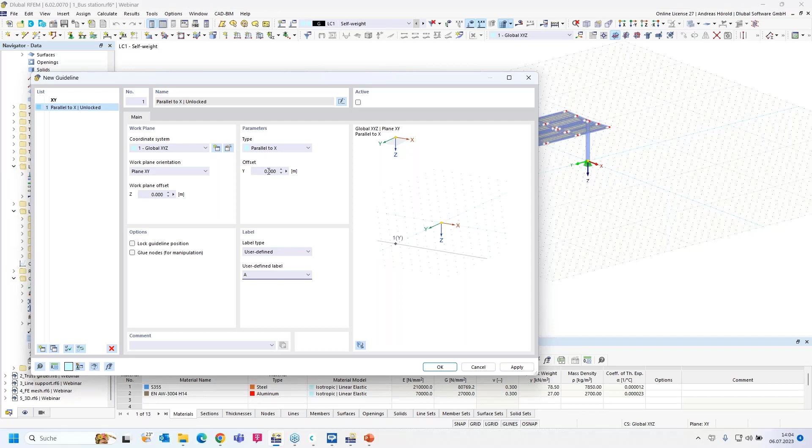So we start with the first guideline. We call it A, parallel to X, and start with an offset of 0. Apply, and you can see in the RFEM window that the first guideline is created.

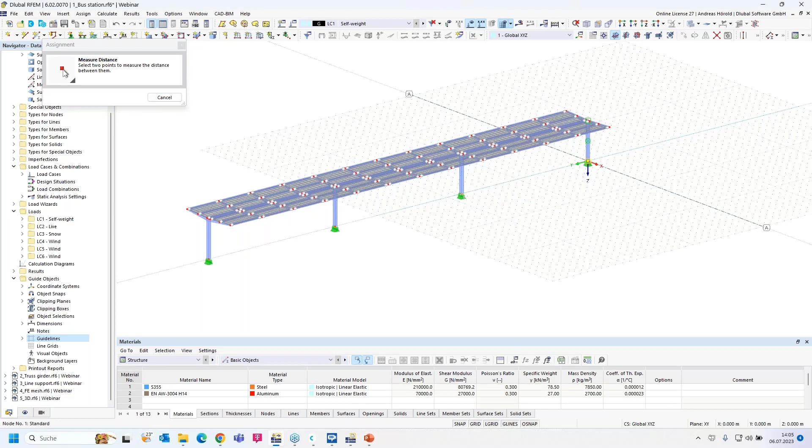We activate it, then copy the guideline and change the offset. Let's measure the distance between the two columns here: 18 meters. We have to rename the guideline. Apply. Then we create the other guidelines with the same workflow, 36 meters, and rename the guideline. Apply.

So, then the last guideline - I change only the offset and the name. Okay, so all the guidelines in the X direction are created.

Now you can see the distance between the name of the guideline and the node is very far. You can change that - for example, when you edit the grid, by right click you can press edit, or I leave the dialog and show where you can find it as well, under Tools, Work Plane, Grid/Snap, and so on.

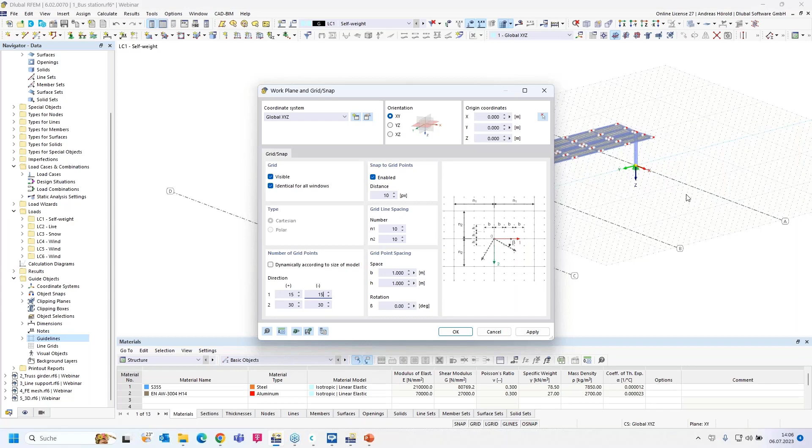Okay, then you can enter distances here: 15 plus and 15 minus in the X direction, and for example 70 and 10 in the Y direction. I apply, and you can see the name has been moved near the node.

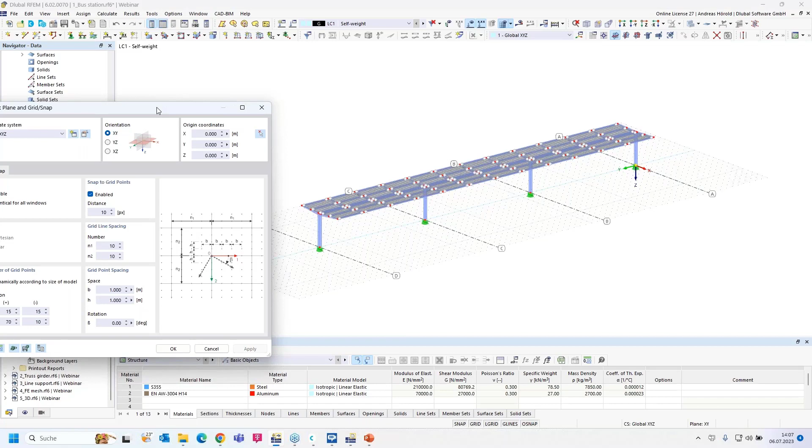You can also check dynamically according to the size of the model. Let's do that, and you can see that the number of grid points are created automatically.

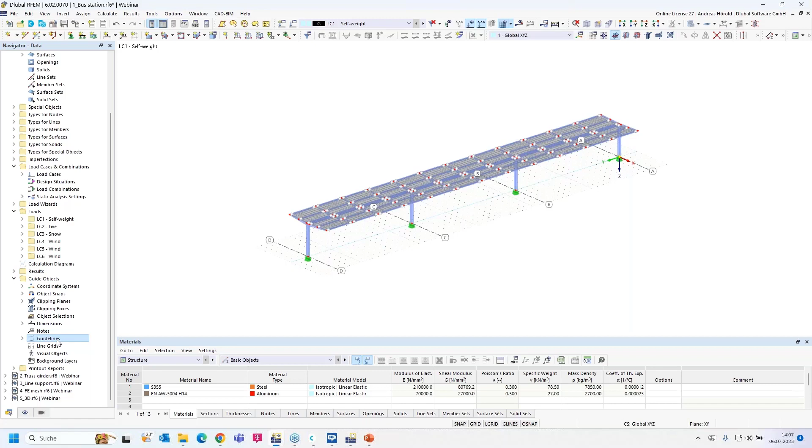Now let's create the last guideline in the Y direction. I create a new guideline, parallel to Y, offset 0, and a user-defined name - I name it 1. Apply that. Now all is okay.

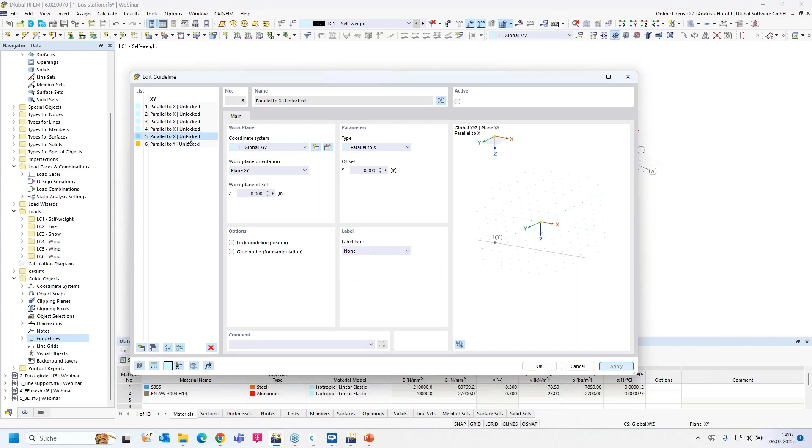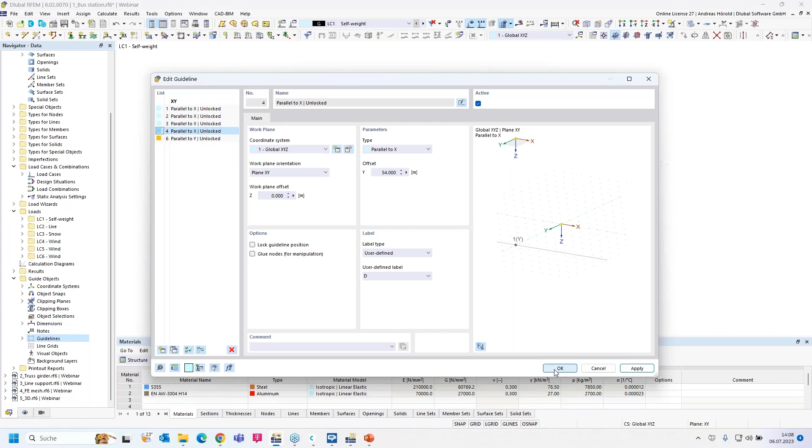No, this one is not correct. Now you can move, copy, or delete all the lines here, or certain lines. Now our guidelines are created - just an example. So then we turn to the next model and the next question.

Next question is: I came across the area of load application setting in the load wizard. How does this setting affect the magnitude of the load in my model? This is a load that has been created with the load wizard. I double click on it, and you can see that dialog. And how you can create such a load, I will show that.

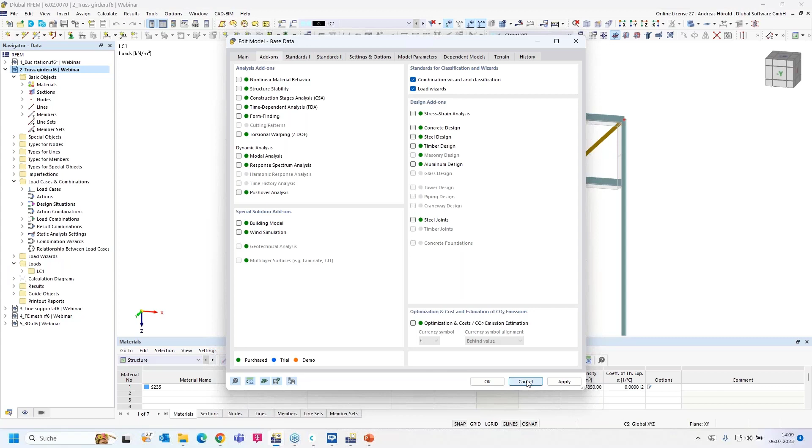First, you have to select in the base data here, left at the top, under add-ons, the load wizard - that must be activated, but this is a default setting. The combination wizard and the load wizard are selected by default. Then here on the left side at the top, under insert, there are the load wizards. There are different load wizards.

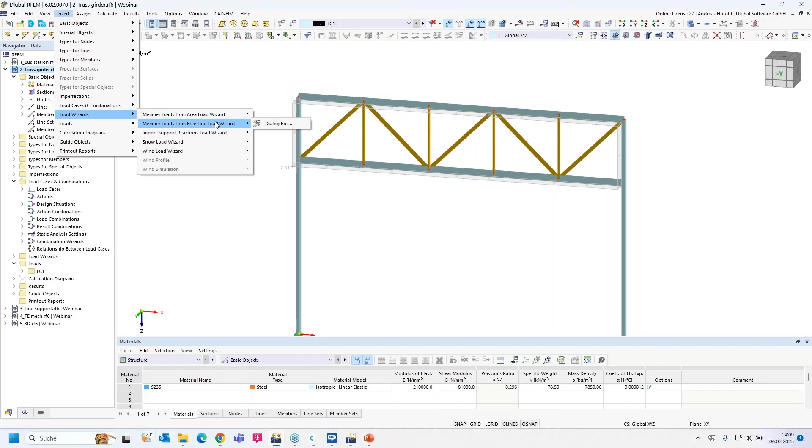Member load from area load wizard, for example - this is the load that I created before, what you can see in the model. There are also the snow load wizard and the wind load wizard, for example, and others. Let's display it separately.

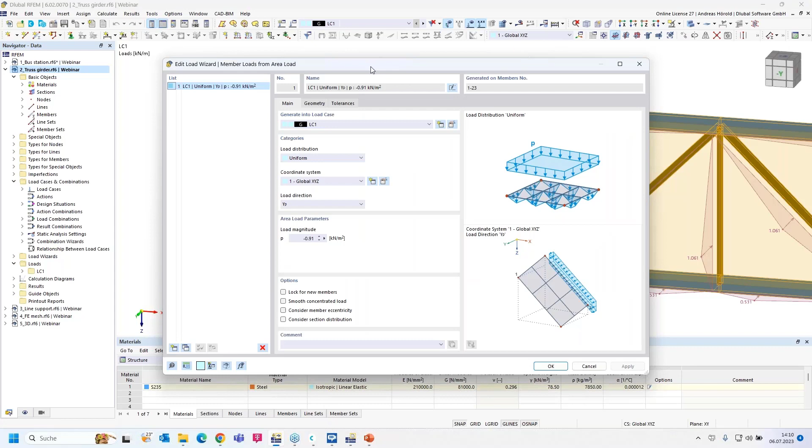With a right click, I can display the loads separately. Now I double click on the load and open the dialog. Under geometry, you can see this setting: fully closed plane. The complete - where there's, for example, a plate or the trapezoidal sheet over the members - and all members get a load, and the wind can affect the full area here.

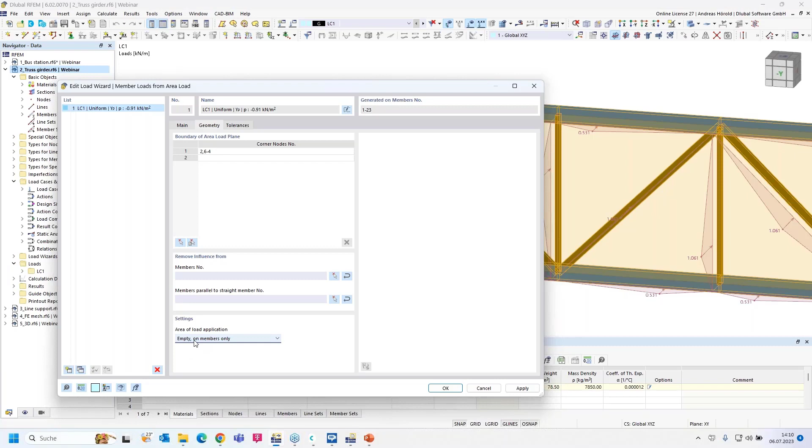So if you want only the members to get a load, only this small area, then you have to select empty on members only. We can see that at the moment the vertical and the diagonals get a load of about 1 kilonewton per meter, and if I apply that, you can see the load has decreased - only the members are affected by a wind load.

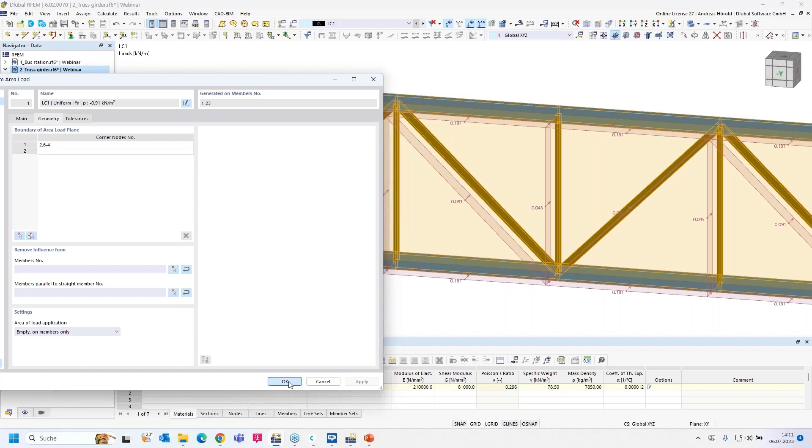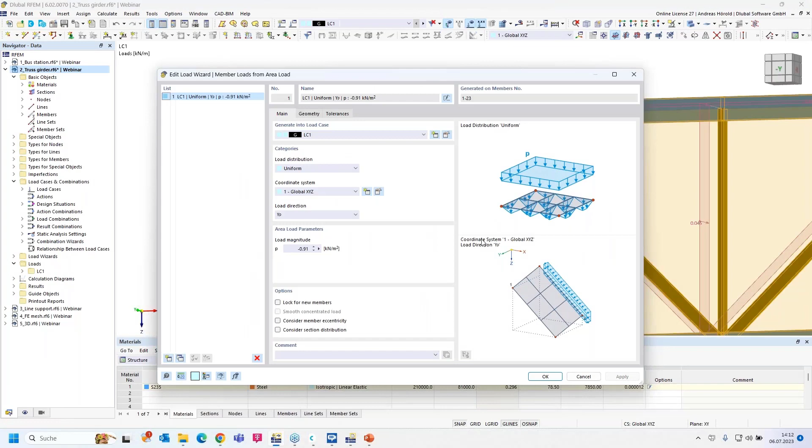So if, for example, you change that member - at the moment the width is 10 centimeters or 100 millimeters - and if I rotate the section, for example 90 degrees, you can see the load has decreased from 0.1 as for this diagonal, and now it's only half of this value. That's the setting. I changed it back, or I press undo, and you can see now the load is 0.1, or about 0.1. Let's do another change.

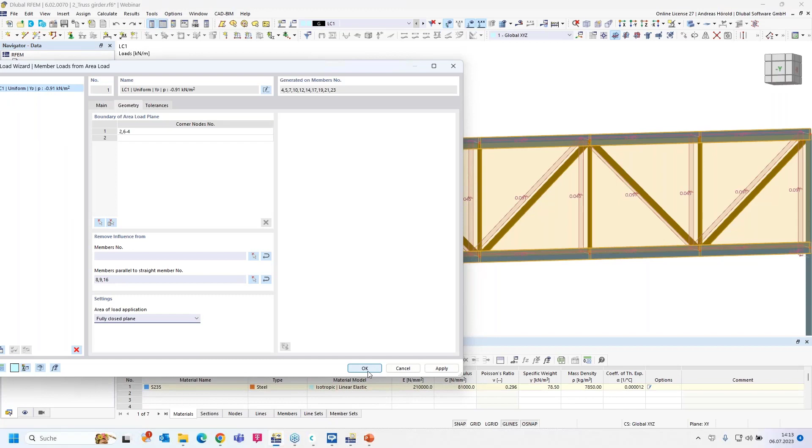Imagine that, for example, a trapezoidal sheet spans from the lower beam to the upper beam, and only these beams are affected by the load or support the trapezoidal sheet. Then you can remove the influence from members parallel to straight members. I select all 3 members, and all members parallel to these 3 members don't get a load. Let's try that - fully closed plane, okay. So now that's the effect when a trapezoidal sheet spans from the lower to the upper horizontal beam.

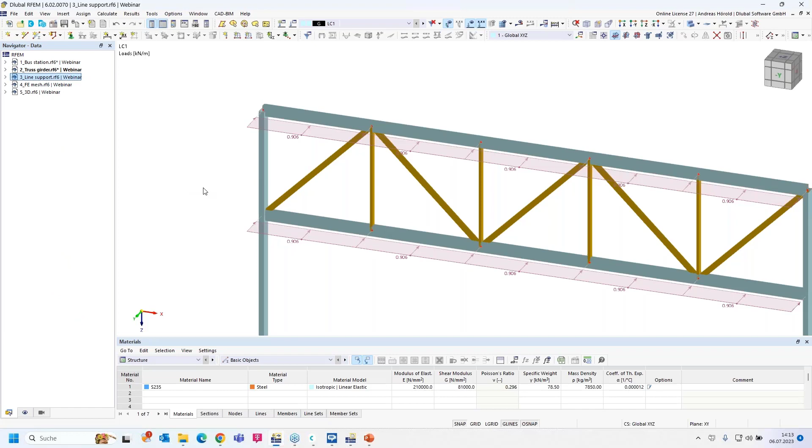Let's turn to the next model and the next question. A surface model, a concrete slab from a building, for example. And the question is: can I get the program to calculate the spring of a wall for line support while modeling the wall at the same time?

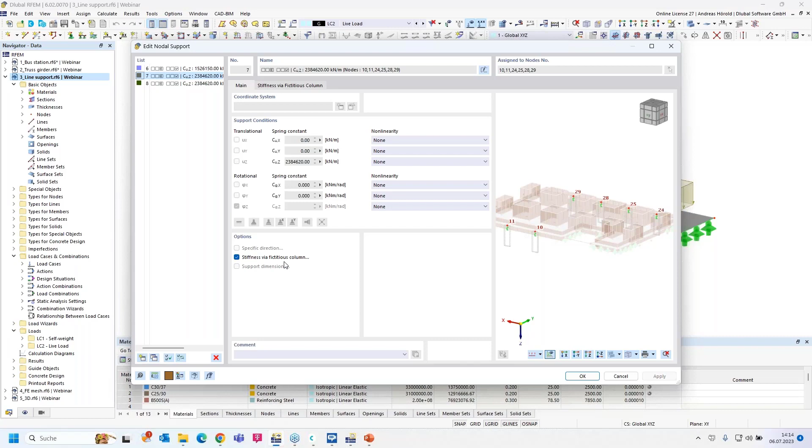In an earlier webinar, we showed a similar function or feature for the nodal supports. Let's double click on this nodal support, and when I press the edit button, you can see where stiffness via fictitious column is selected. When I turn to this dialog, I can see the model is supported by elastic surface foundation, elastic nodal support, and so on. You can enter dimensions, the height, and so on. Then if the column head is hinged or semi-rigid, and when you change that, the values for the springs are changing.

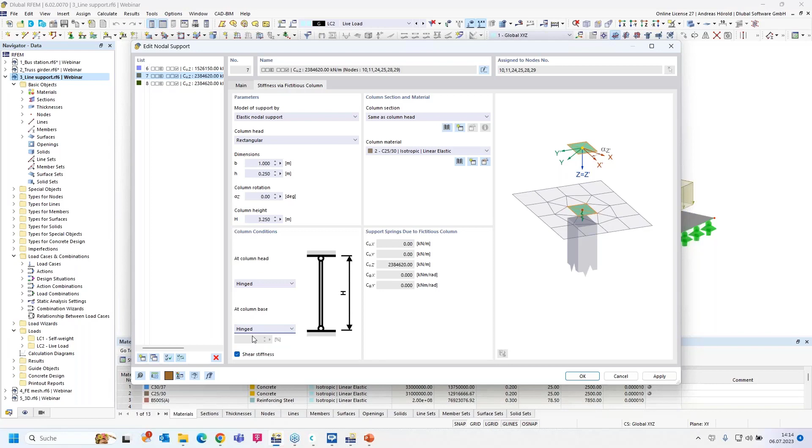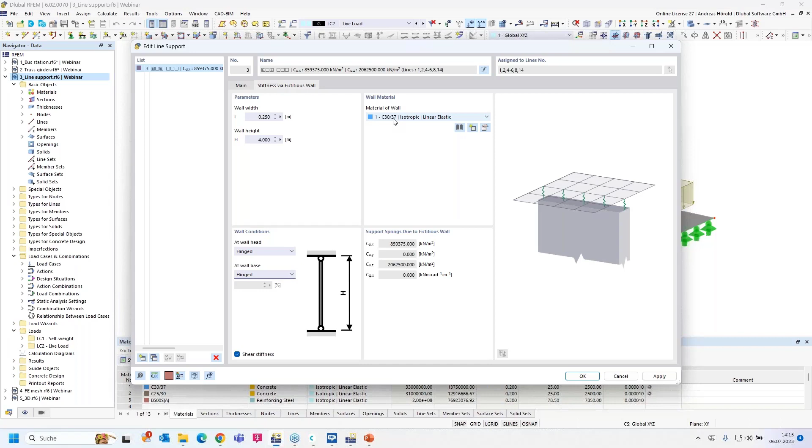Okay, so I leave the dialog, and we have a similar function for the line supports. I double click on the line support to edit all the used line supports. Now you have to check the stiffness via fictitious wall. In the preview, you can see the walls already, so you can enter a thickness of the wall, a wall height, and whether the wall head is hinged or rigid, also for the wall base. You can enter a material - I'll leave the concrete material as it is at the moment. And you can see, as mentioned in the preview, the considered wall.

Okay, and now you can see also springs for the line supports here, and this can avoid or smooth singularities in the FE calculation. That's the advantage. Okay, that should be all for this question and this model.

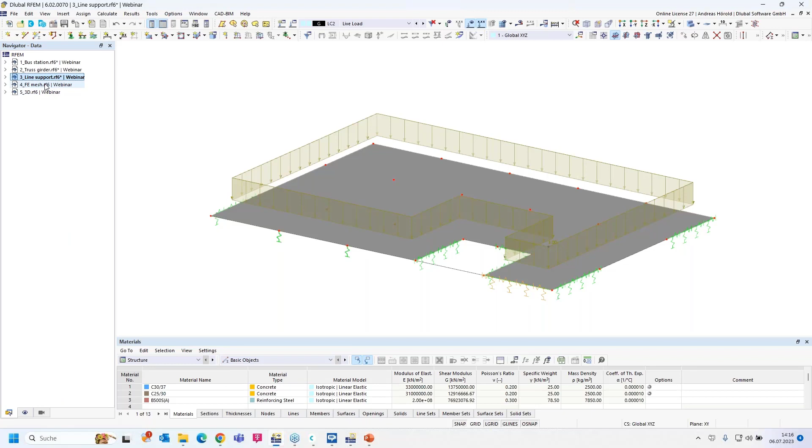We turn to the next model and the next question. The next question is, how can I create multiple FE elements across the thickness of elongated thin solids without having to create an extremely fine FE mesh?

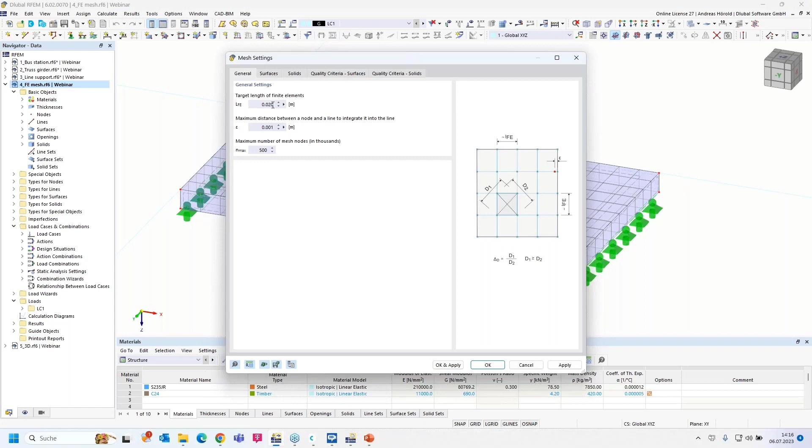At the moment, you can see a steel plate here with a thickness of 20 millimeters. I can go to the FE mesh settings. The FE mesh size is 2 centimeters, 20 millimeters - that's the thickness of the steel plate. And you can see for the width and the length, the size of the FE mesh is quite okay, but not for the height. There's only one FE mesh.

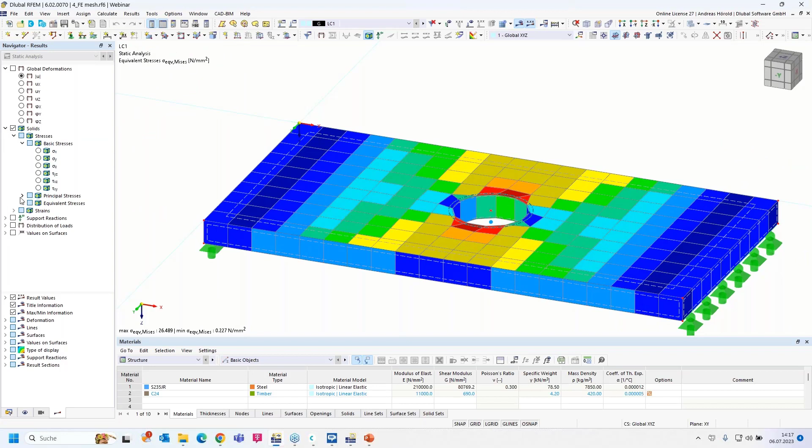You can see that in the results. There's only one FE element, and the results in that case - what is selected, the equivalent stresses, the sigma V mises - that's not okay.

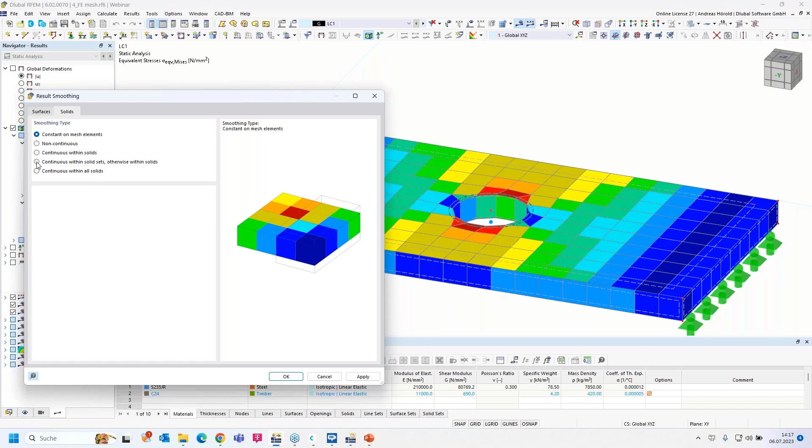For your information, under calculate, you can find the result smoothing, and at the moment there is no smoothing. You can see that here, constant on mesh elements. Those are the real results without smoothing. That looks quite better, but those are the real results, the constant on mesh elements.

So I double click on that point here to get into the dialog from the solid. Another possibility would be to go on the left side to the navigator data at the bottom, then open the solids - there's only one solid. You can double click on it or right click and edit, and the same dialog has been opened.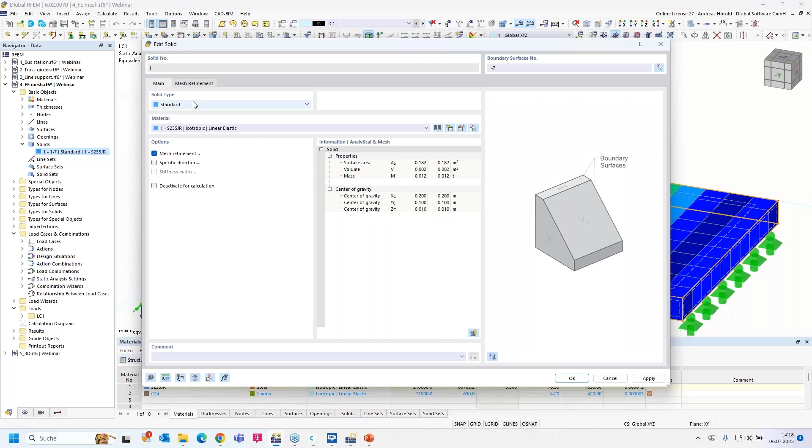So then I selected mesh refinement, and there is a quite new feature, the layered mesh. If you activate it and select one area or one surface, then the opposite surface has been selected automatically by the program, and you can see that in the graphic. You can define a number of finite element layers.

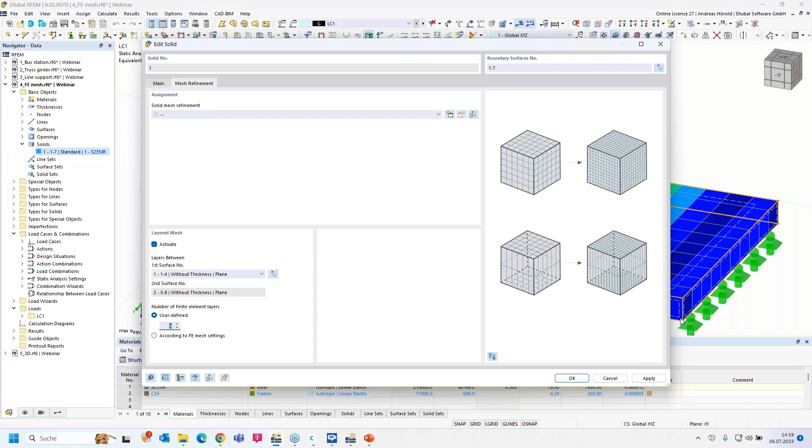So I increased it to 4 - at least 4 or 5 mesh or FE elements should be used for one distance here, in that case for the height or for the thickness. Okay, I applied it, let's create it here at the top.

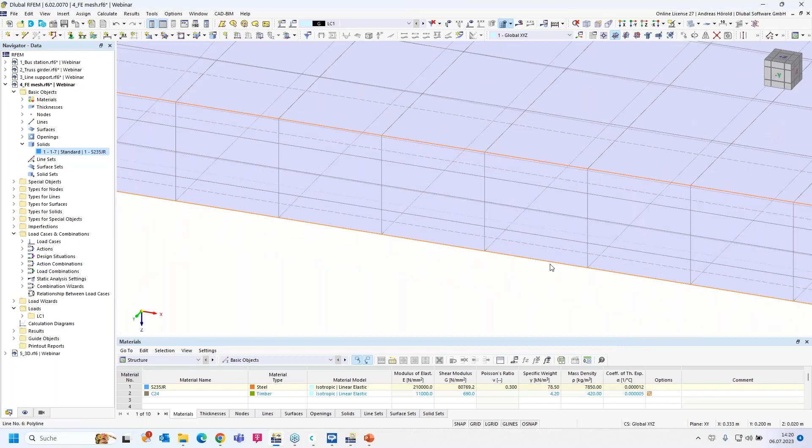We'll generate the mesh. Okay, and now you can see there are 4 elements or 4 layers for the thickness. So let's calculate all again. Okay, that looks quite good - there are 4 elements in the height, and the results are better than before.

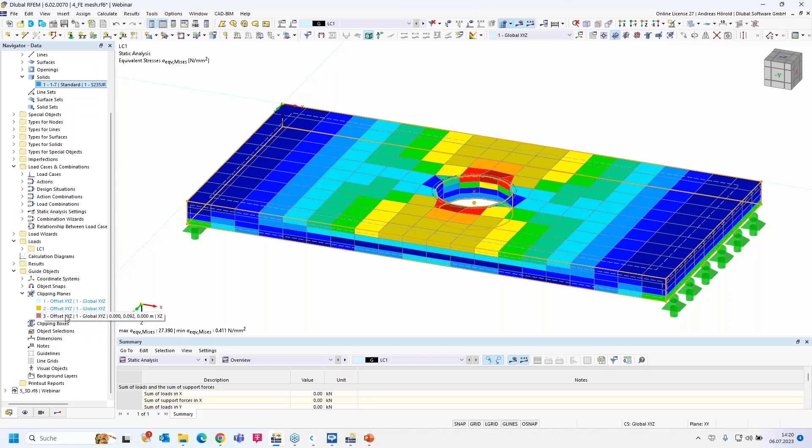Let's go through the solid here with the guide objects, with a clipping plane. I activate any plane here, okay, and now you can go through the solid and you can see the results are quite good, good to evaluate.

Okay, that's all for this model and for this question.

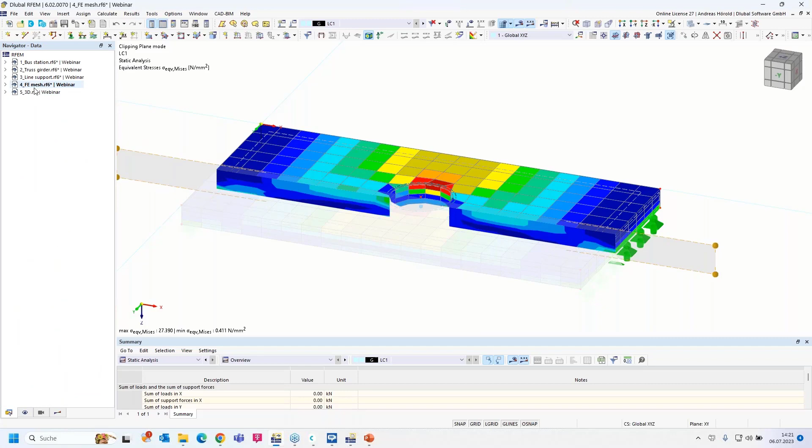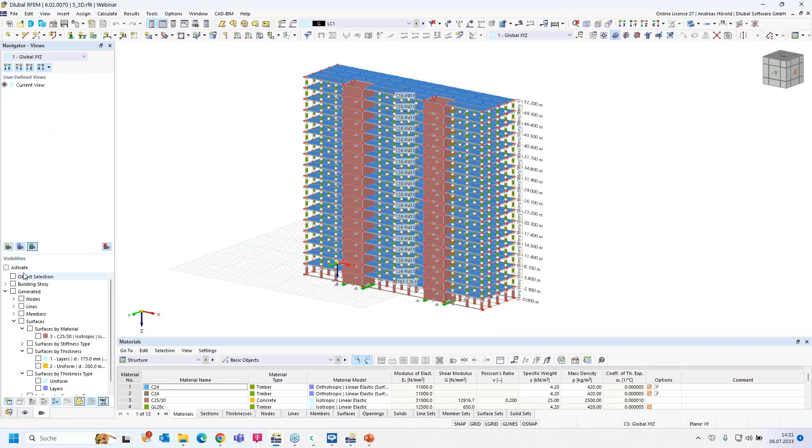And the next question is, how do I customize the appearance of objects in the background? So you can, for example, select only the concrete cores. At the bottom left, you can go to the views and then activate the visibilities and the concrete surfaces.

And you can see the hidden objects are quite good to see, but a lot of users ask, how can I modify the transparency? So how to do that?

Yeah, you can of course completely make that invisible with this function here, show hidden objects in background. You can deselect that, and you can see the deselected objects.

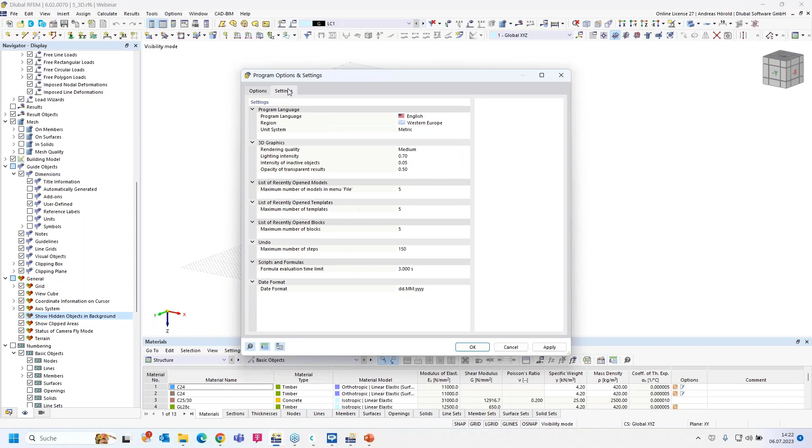So let's change or modify the transparency under options at the top. You can go to the program options, and under settings you can find this setting here, intensity of inactive objects. Now you can increase the number here, apply, and you can see the changes.

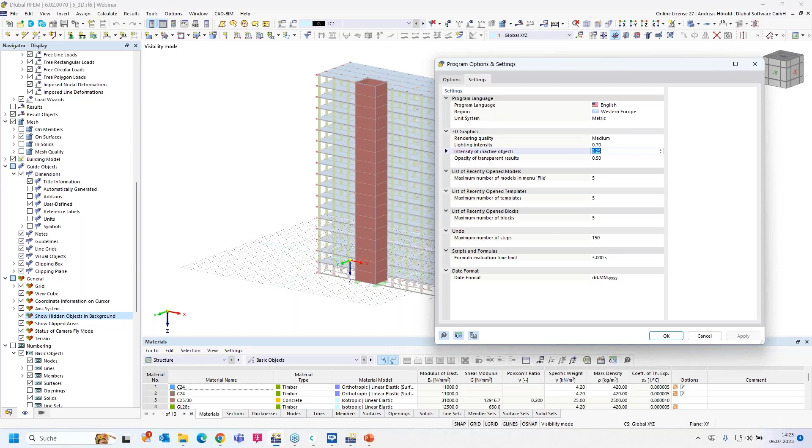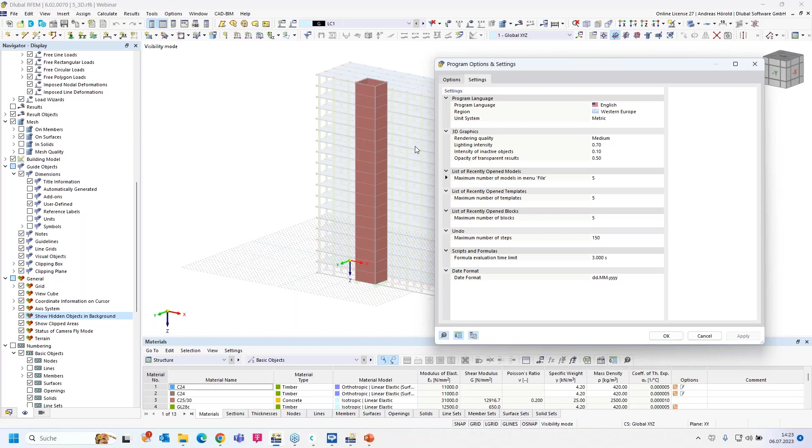Okay, a quite important feature, because sometimes it's annoying when you see all the deselected elements and so on.

Okay, so then we turn to the last question for today. I turn back to the first model, the bus station, and display the results. The deformation is okay. In the model space of RFEM 6, I can exaggerate the deformation according to a factor. How can I do the same in the graphic printout, or rather, how can I adapt the same factor of the display from the model?

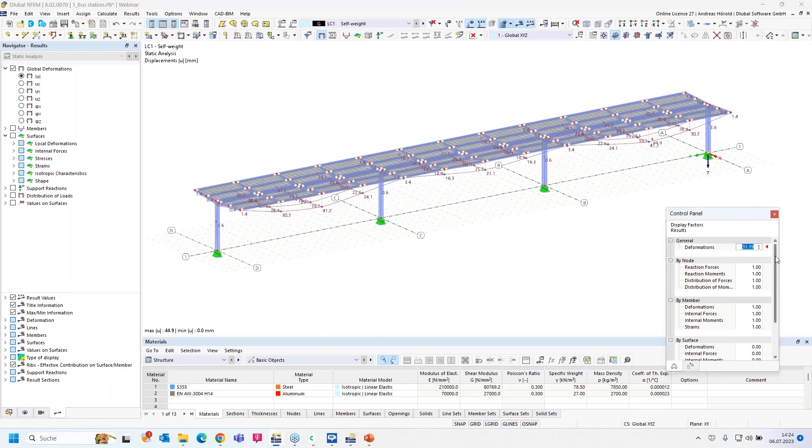So I select the control panel, or I display it, and you can change the number here, the deformation factor. You can increase it or decrease it.

And the question is, how can I do that in the printout report? So let's print that graphic in the printout report. Here, left at the bottom, you can find the feature print graphics to printout report.

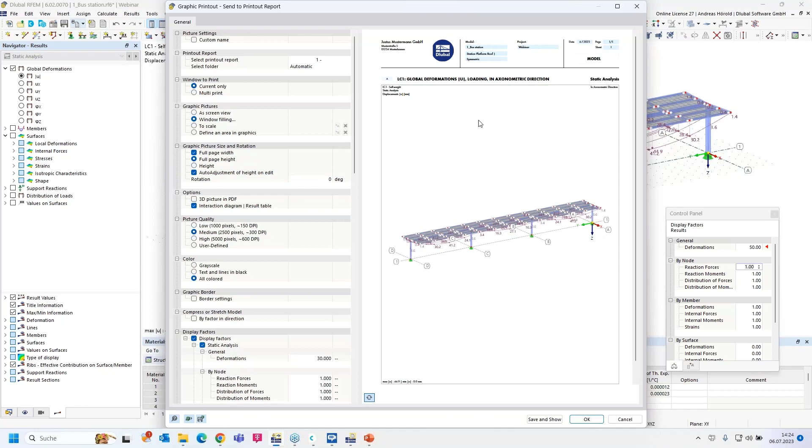So, under the default setting is that, and you can select the display factor and the static analysis in that case, because it's the deformation from the static analysis. So, you can increase the number as well, and you can see the change in the preview here.

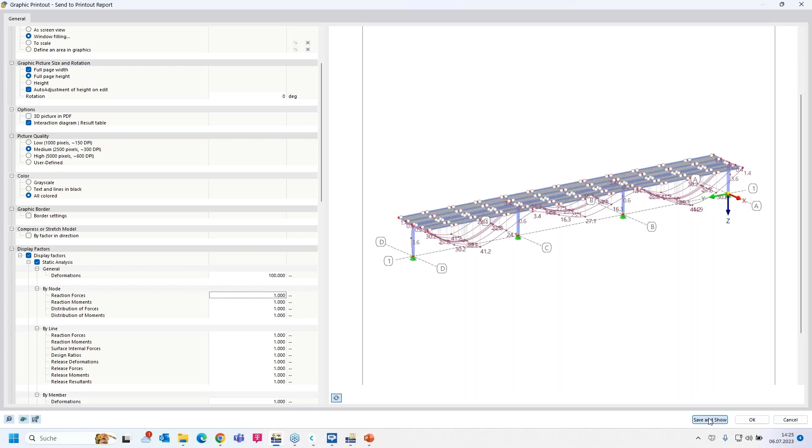So then we can press save and show, and we can see the graphic in the printout report. And you can change or modify that graphic afterwards as well.

So let's do that. I do a right click on the left side, then properties, or at first I press edit.

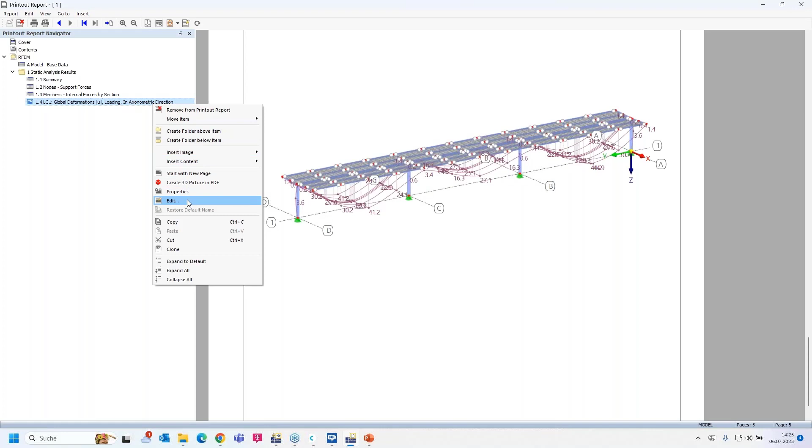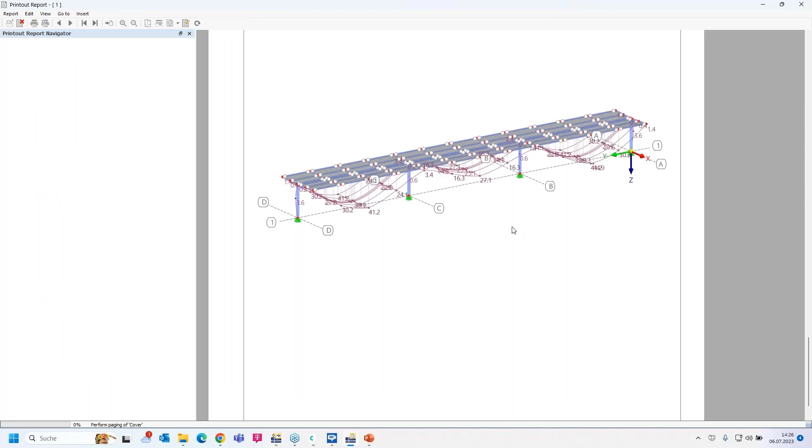Okay, then you turn back to RFEM, and for example, you can change the view, right at the top, for example, in X direction. So then it should be updated in some seconds.

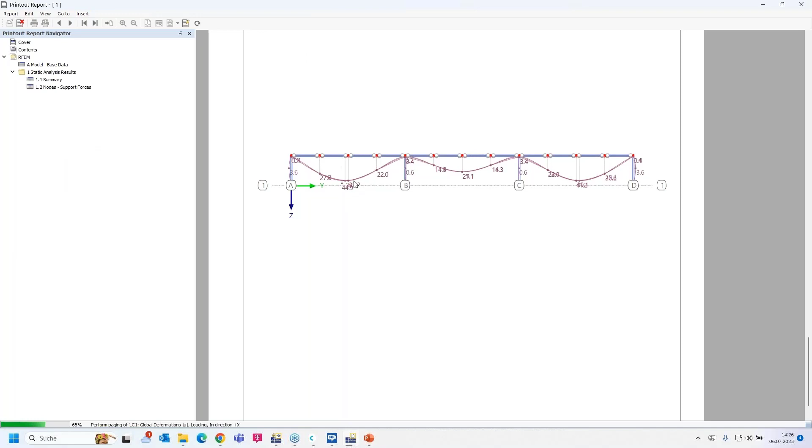And you can also change the properties, for example the deformation factor. So, and the graphic should be updated. Okay, now I think a quite good hint.